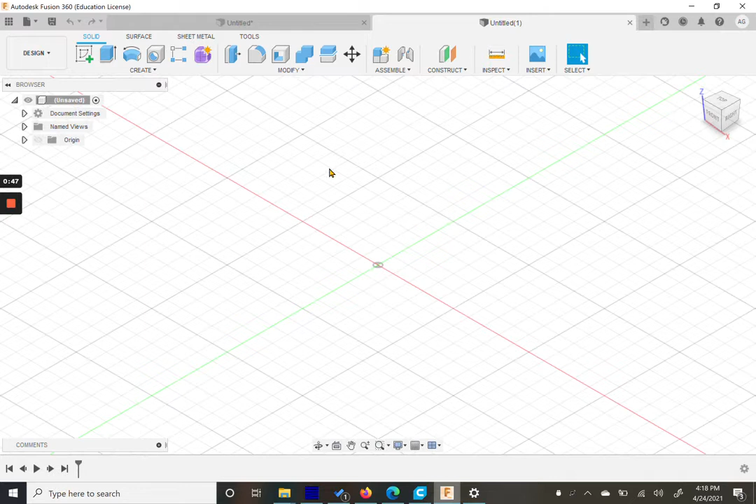So I'm going to show you at least some little bits of how to get to all of the same pieces that you would from those other two programs. So first things first, we currently just see our work plane here. We need to start with a sketch, just like in Onshape and Inventor. We can click on the create a sketch option, and it will actually show us our planes, similar to the way Inventor pops your planes open.

So we can choose whichever plane we'd like to work on. Let's say this time I'd like to work on this one, and it'll bring us flat to our sketch plane. So again, similar to Inventor. So in here, now our ribbon has changed to our sketch ribbon, and we have a sketch palette over here, which is a little different. That gives us some extra info. But for right now, we're just going to worry about the ribbon at the top here.

We have our create panel, modify panel, some constraints, inspect, insert, select, and so forth. Okay, so if we need to create shapes, we'll come to our create panel. Our most used will be at the top here. We could make rectangles and circles, and we can add our measurements as we create.

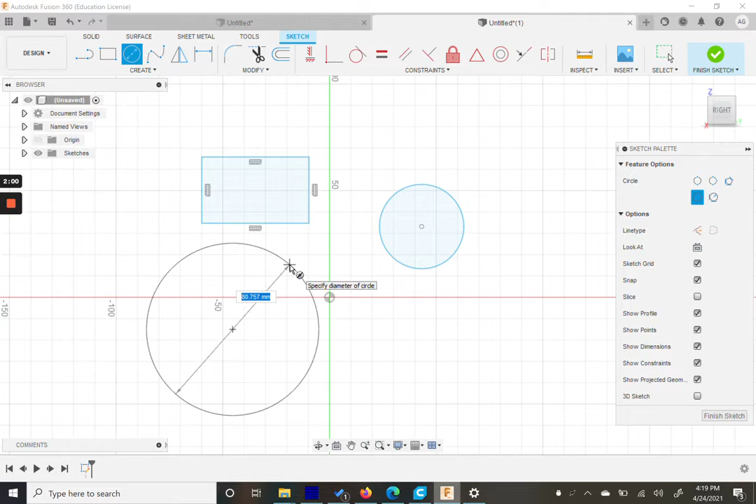So when we click to place the center point down, instead of clicking to put down the size and then typing like in Onshape, this is much more like Inventor, where you click for the center and then you have to type before you click again or before you click enter, so that you can give yourself a dimension.

With this create panel, you can actually click it and it is a drop down. So similar to how Onshape has lots of drop downs for their many tools, this has drop downs in the panels themselves. So we can actually see our sketch dimensions is at the bottom of this panel here.

Sorry, that's my dog's tail.

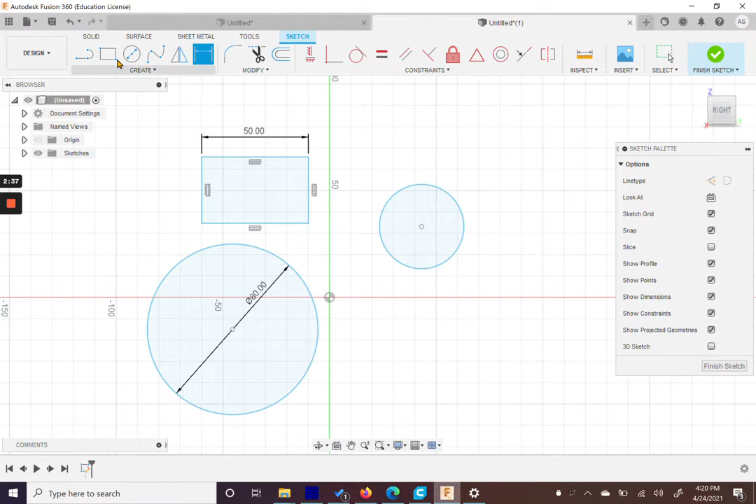So we can click on sketch dimensions if we wanted to add any other dimensions to our shapes here. So let's say we wanted to add a couple lines. We can zoom out. I'm just using the scroll wheel on my mouse to zoom out, and then I am clicking in the scroll wheel to pan. You can also see these tools down in the bottom bar down here.

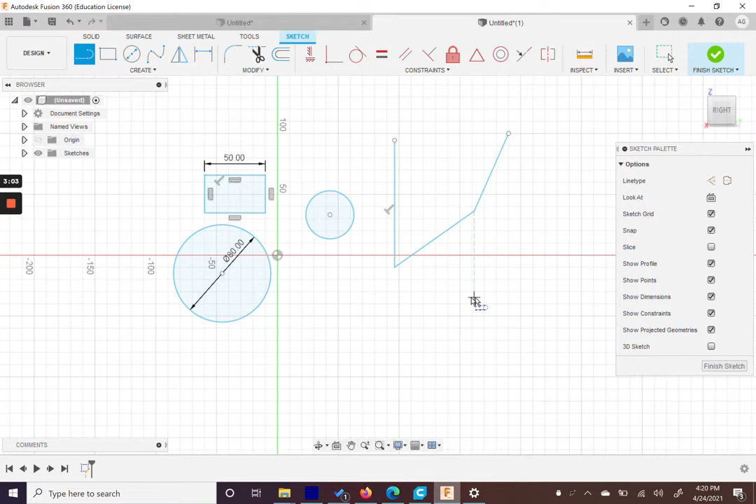But to make some lines, we can click. If you see, there's a little checkbox that you can create and continue instead of needing to go click on our tool or click the escape key. One of the advantages of our line tool here, similar to Inventor, would be the fact that if we click and hold, it'll let us make arcs. Oh my goodness gracious. All right, so then we have a profile here.

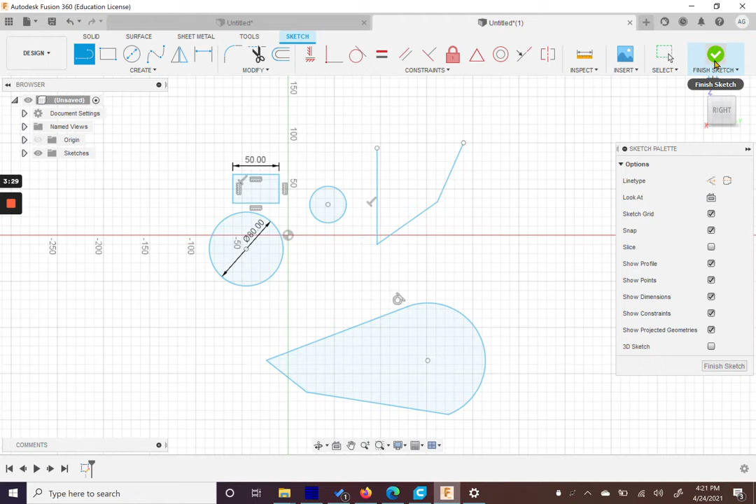Okay, and as we have our profiles and our various shapes and lines, we can finish our sketch, and we can start to create things in 3D. If you've noticed, this actually does leave us flat with the plane of our sketch, similarly to Onshape, instead of moving us back out to our isometric view or our home view. Up to you how you'd like to change your views, but from here we can use our extrude, our revolve, our hole tool, many of our creation tools.

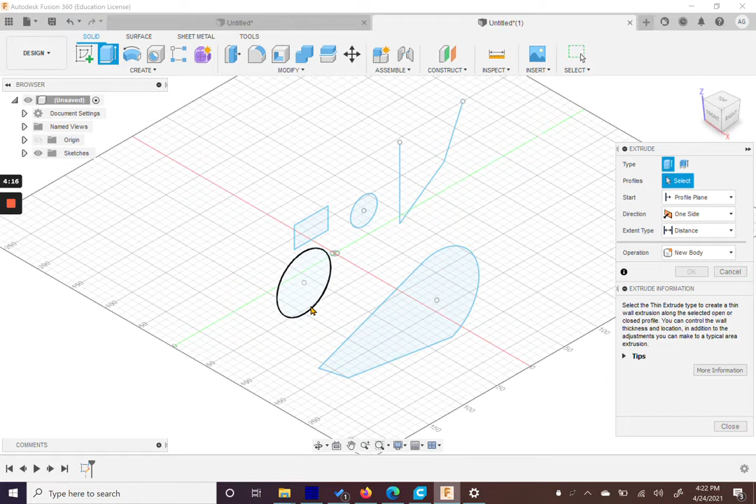Again, similar to Onshape where it has all these drop downs, except in this case it is this whole panel that drops down. So we have our extrudes, our revolves, our sweeps, and so forth. The majority of what we'll wind up using for right now is in this little chunk right here. So let's say we wanted to extrude, maybe we'll extrude this little shape right here.

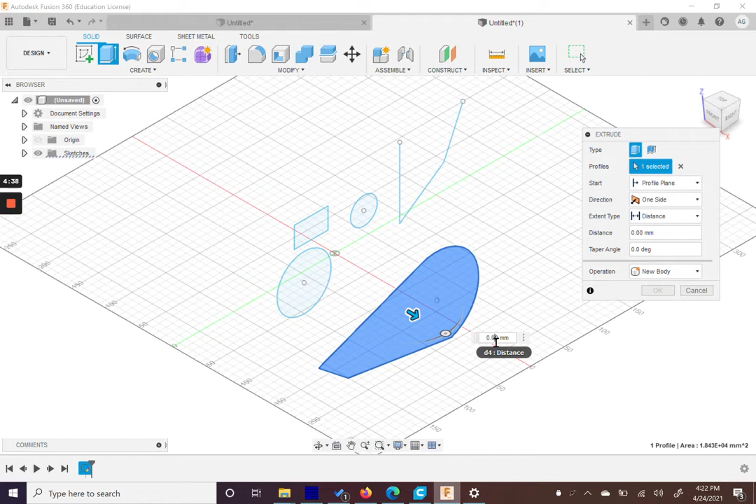And if you notice, it brings up that tiny dialog box again, similar to Inventor, but also has our menu box over on the side that gives us our more specific details and things we can change. So let's say we wanted this to be 10 millimeters. We can type, we can hit enter or OK, and it'll create an extrusion, a body from that piece.

But we had so many other things in that sketch. So let's say we wanted to go back and use that sketch again. If we think about how we've done this in Inventor and in Onshape, we can go take a look at our browser on the left.

Okay, our browser looks a little bit different since it doesn't really have that much of a background, so you can still see behind it. But we actually see a little arrow for our sketches, a little folder here. We open the arrow, and then we have sketch here that we can change. So if we double click here, just like in either of the other programs, we can come back and edit whatever we needed to do.

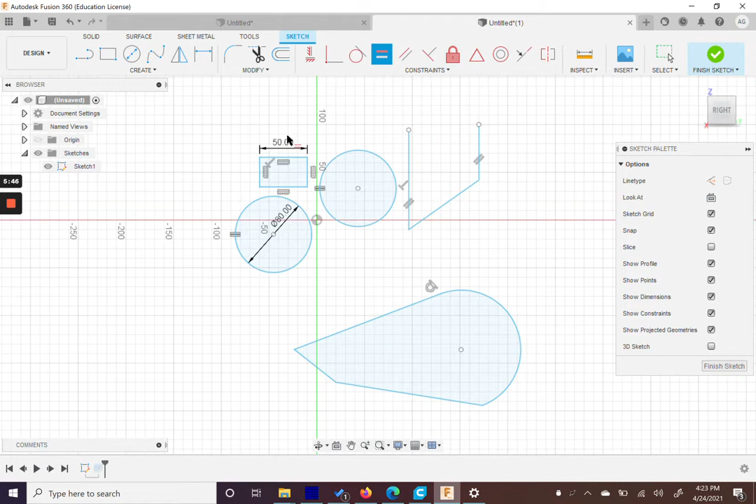Let's say we wanted to add some constraints, make some things equal to each other, or parallel, or however we'd like to do. We have constraints just like in the other programs. So let's say we wanted a couple of these lines to be parallel to each other. Maybe we want our circles to be equal to each other. Okay, we can go use our constraints to edit that sketch. Okay, I'm going to accept.

But now we still actually want to use this again. So if you notice, just like Onshape, there's this little eyeball for visibility. We can click to toggle our visibility with this little eyeball button. In Inventor, that is the one different one, where that was where you had to right click, but it does have some information for visibility in here as well.

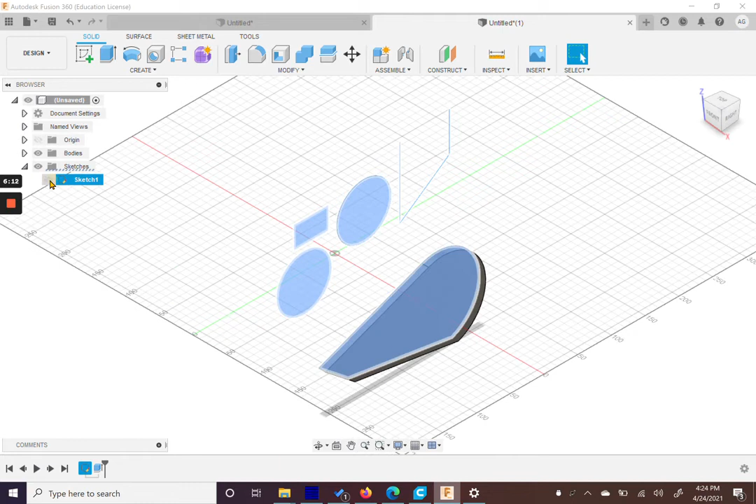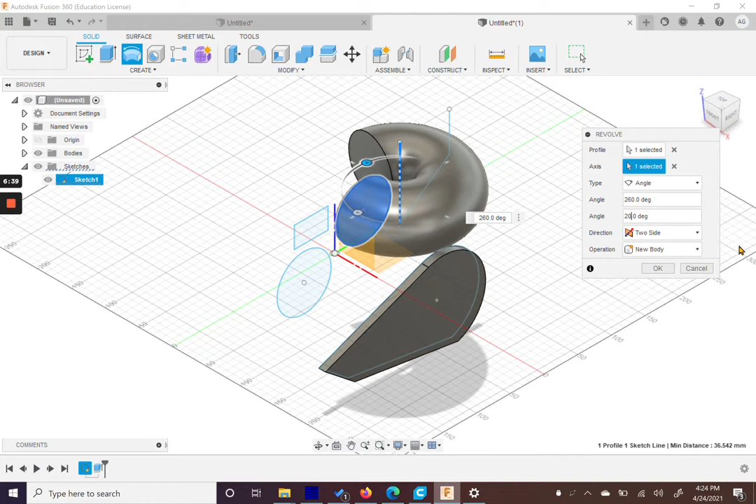Okay, so once we can see the rest of our shapes again, we can go and we can maybe create some revolves where we click on our profile, we choose the cursor for our axis. It will let us change our degrees if we needed to. Say we only wanted 260 degrees and we wanted it to go in 2 different sides, and this will go in just 20 degrees, and we can click OK. Okay, if you notice, we can create different shapes just like before, just like in any of those other 3D modeling programs we've used before.

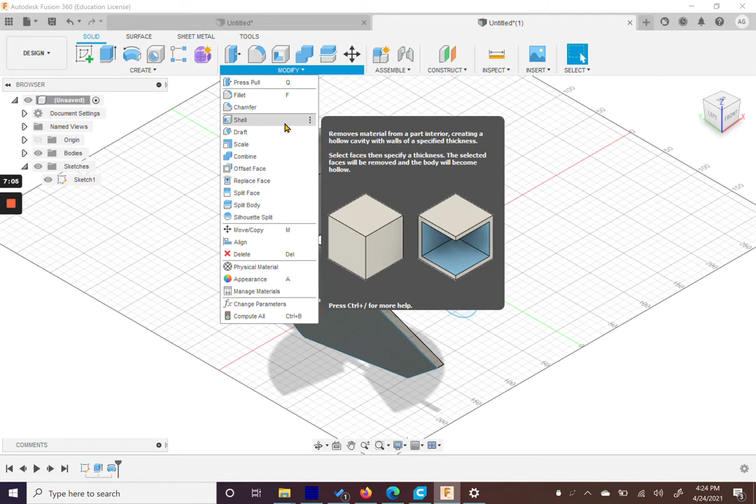Okay, there are modification tools as well. All right, so when we're talking about modification, we're talking about our fillets and our chamfers or our shells. There are more options for modification in Fusion 360 than we've used before, at least for my class. So in here it gets a little dicey depending on what you are comfortable with. But we do have our fillets, our chamfers, our shells, and so forth.

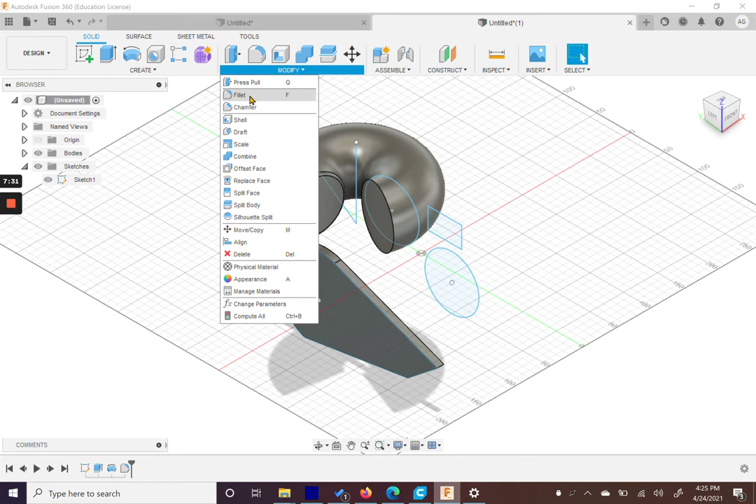So let's say we wanted to fillet some of our edges here. Okay, we can give ourselves some curves. We can give it a chamfer if we wanted to make that flat cut along the edge here. All right, and these are at least our general basics.

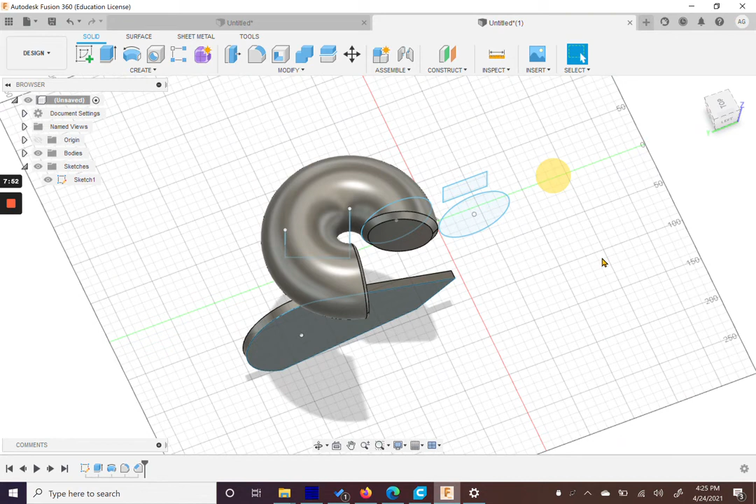If we need to rotate, remember you need to come up to your view cube to actually do any rotation. If you're just trying to use your cursor, you have some options down here, but at least for the general movement, it's not like Onshape where you can right click, because remember in Inventor and in Fusion, right click does bring up our context menus.

And then other quick basics and things you need to know. So we have our sketches that we've looked at editing, but what if we wanted to edit the revolve here? So usually for most of Onshape and Inventor, we'd come look on our browser on the left and it would say revolve 1 or something similar. We'd be able to edit it in there. So in here we see sketches. Okay, we don't really see features.

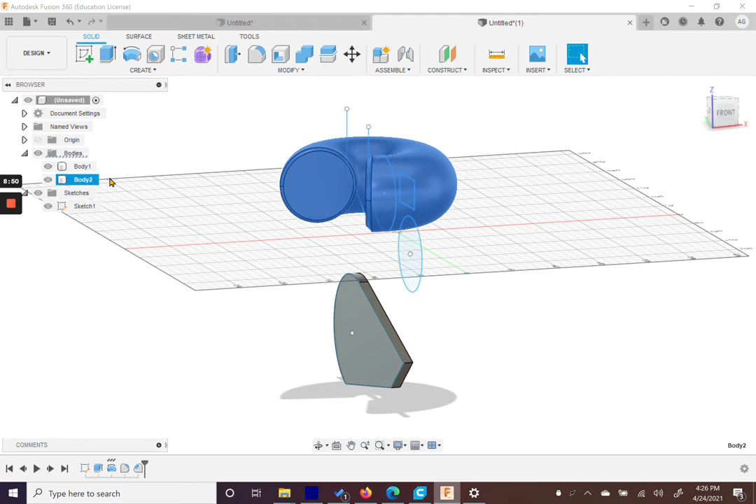So if we open our bodies, if you notice, we see the 2 pieces we've made, but these don't let you edit them. So let's say I wanted to hover over this circular donut thing. Usually the double click or the right click and edit would allow us to change things, but in this case this is seriously just talking about this whole piece with all the changes we've made to it instead of each step we've done so far.

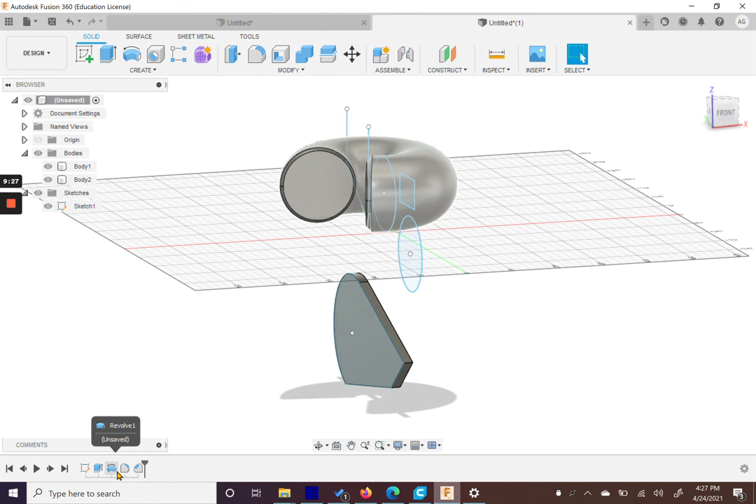So if we want to do something and edit like the revolve or the fillet, we can actually come down to the bottom here. Okay, down here it's kind of neat. We actually have a rewind and play. It's an interesting menu that lets you kind of see step by step what things have happened throughout your development process here, but it also allows you to see the features that you've created. So we can come back through here and double click and go and edit the features that we've created.

So let's say we wanted to change this, just to go back to one side again and accept, and we'll go back and change that info. We can also still right click and edit the feature as well, similar to how it works in Onshape and Inventor in the browser, but either way the features are down here. You have suppression just like in Inventor, and I believe actually Onshape. But we have suppression, we can delete it here if we need to. There's options down in this portion.

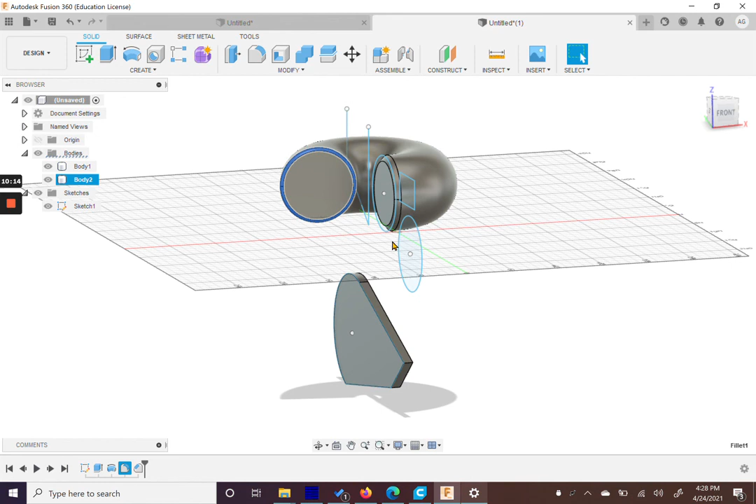Okay, so at least for right now, that is going to be it for our couple basics, and we will have some more videos showing the next little bit soon.